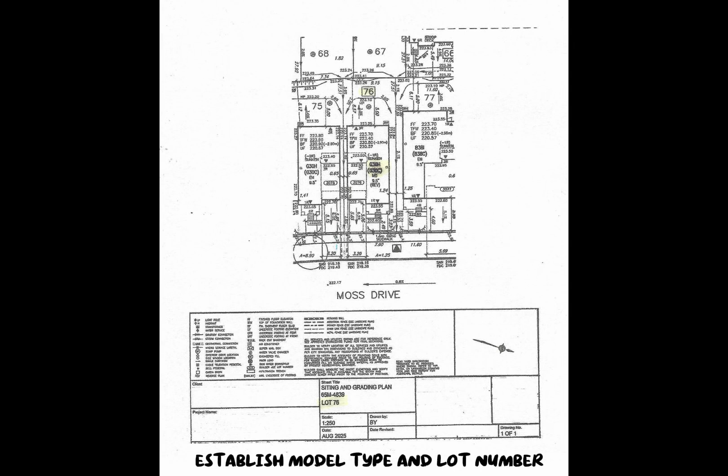Let's get started. In the image that you see on your screen, I've highlighted some key elements in yellow: the lot number and the model type. This is where everything begins. These two pieces of information set the foundation for understanding the entire siting. As we move along, we'll continue identifying even more critical details, and remember, if you're ever unsure about what something represents, always take the time to reference the legend as it's there to guide you.

Next, you'll notice highlighted in pink are our critical elevation numbers that we must achieve. This includes our FF, finished floor, TFW, top foundation wall, BF, basement floor, and UF, underside of footing. All key reference points that guide how the foundation is set and ensure everything lines up correctly with grading and drainage. You'll also see noted here that the unit has 9.5-inch joists and it's a reverse plan. All this information is essential because it directly impacts how the foundation is built and how elevations are applied on site.

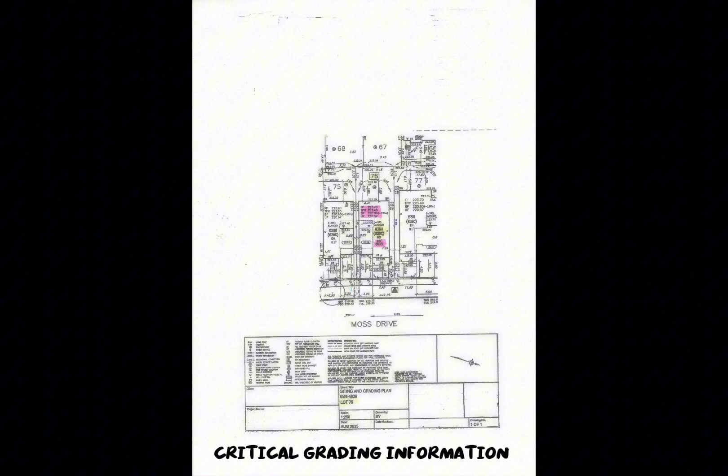Next, highlighted in blue is a 1R sunken landing at the rear of the garage. This indicates that there is a required 8-inch reverse veneer check on the inside of the foundation wall to accommodate that drop, as per an architectural drawing and the grade condition indicated on the siting. But that's a lesson for another day. We'll show you how to do that for a mudroom.

Also highlighted in blue is the front porch elevation, shown relative to the finished floor and the top foundation wall, along with the number of required risers. You'll also notice the 3R condition at the rear of the home, which would require 2 physical steps to achieve the proper rise and run, allowing for a safe and comfortable transition from finished grade up into the home as per architectural drawings and grade conditions indicated on the sitings.

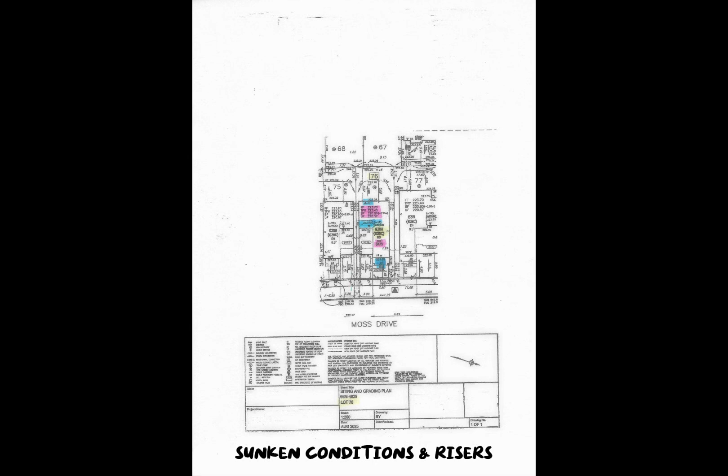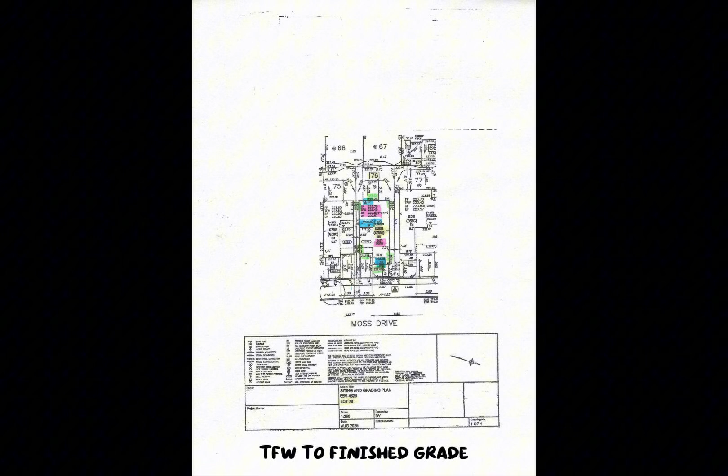Next, we're going to discuss final grades, or grass elevations. They are highlighted in green at multiple points across the foundation wall on the siting. It is crucial that you use these numbers closest to the foundation wall to ensure accuracy. At times, you may see two sets of numbers that are very close to each other. Typically, one represents the high point and one represents the low point of the swale, which can be significantly lower than the number we're actually working with. So keep this golden rule in mind. Always use the number closest to the wall itself.

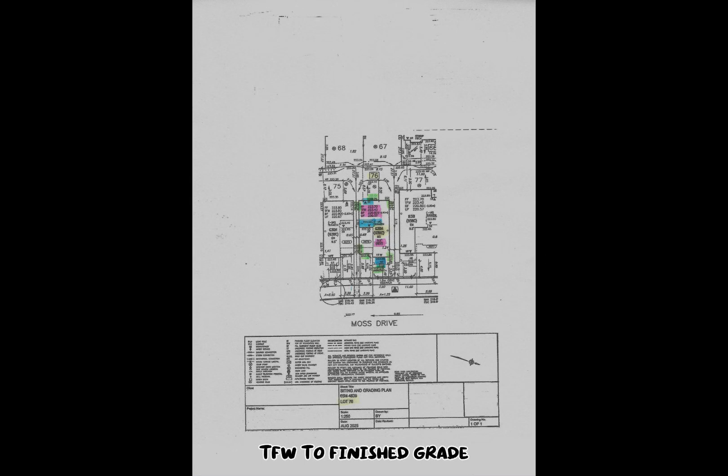Once all of these elevations have been identified and confirmed to be lower than the top foundation wall, we can move on to calculating the differences between the top foundation wall and the finished grade at the critical points. These include the rear corners, the mid-rear wall, the top of the garage slab, the future patio or walkway, and the side grades running from front to back.

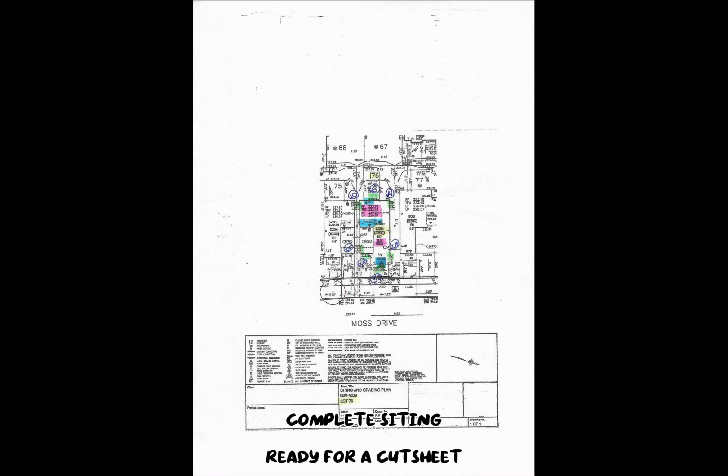Always remember to convert your measurements into imperial, as low-rise residential construction still operates in the imperial system. For example, if we have a top foundation wall of 223.4 and a finished grade of 222.75 at the garage, the difference is 0.65 meters or 65 centimeters, which translates to approximately 25 inches. That concludes this section. That's all the information you'll need to complete a proper cut sheet for the foreman crews, ensuring a top quality pour without errors.